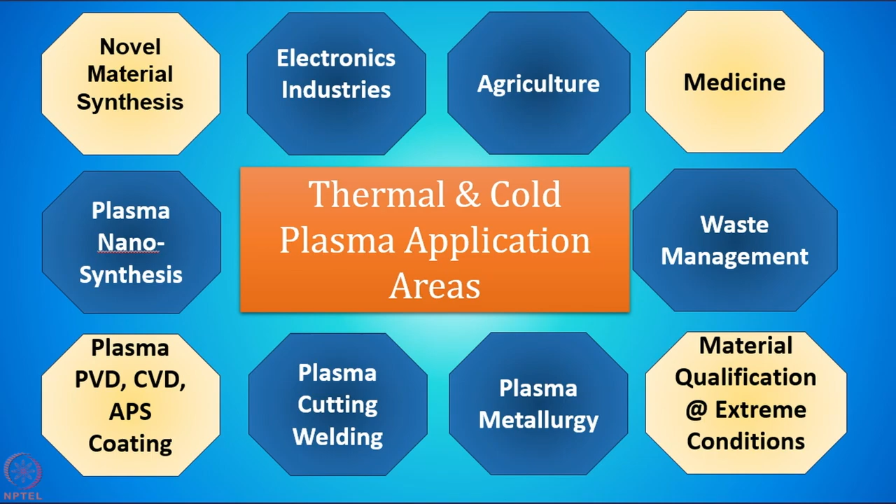In this class, we will be starting the plasma application, and we have already discussed the different areas we are planning to target in this section on thermal and cold plasma applications. The first one we will address is thermal plasma technology as an environment friendly route for waste management. I have used the term waste to wealth, and this is true by all means, since waste processing is now one of the most profiting sectors in the waste management area. Waste management using thermal plasma is a very useful technique, and why it is so, what benefits you can get, why it is called environment friendly, and what wealth you can generate out of it, that we will discuss in this lecture.

In this slide, what you are seeing is a news article from 2019. I have just copied and pasted it, I have no contribution in this slide generation. The newspaper is saying waste to energy plants that use solid waste as feedstock pose threat to environment, highlighting the necessity of high temperature for WTE, or waste to energy, plants in India. Plants in India burn mixed waste, and the presence of chlorinated hydrocarbons like PVC results in the release of dioxin and furan when the waste is burnt at less than 850 degrees centigrade. So appropriate filtering mechanisms need to be installed to control such dangerous emission. This is what the newspaper is saying.

And why do they require high temperature? They know that this is required because if you burn at temperature less than 850 degrees centigrade, some very carcinogenic components called dioxin and furans will be generated, and they are not good for our health, they are really dangerous. So emission remains a major issue with the residents. They are saying the plant was slapped a fine of so many lakhs by the National Green Tribunal. So the message we want to convey is that the normal conventional waste to energy plant concept is not new, but the waste management technique that has been in use is not a good one, not good for the environment and not for the citizens living around that plant.

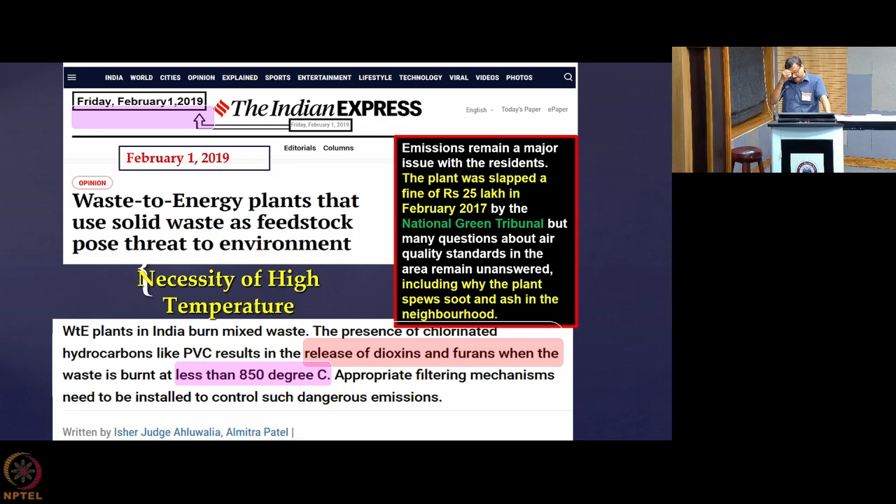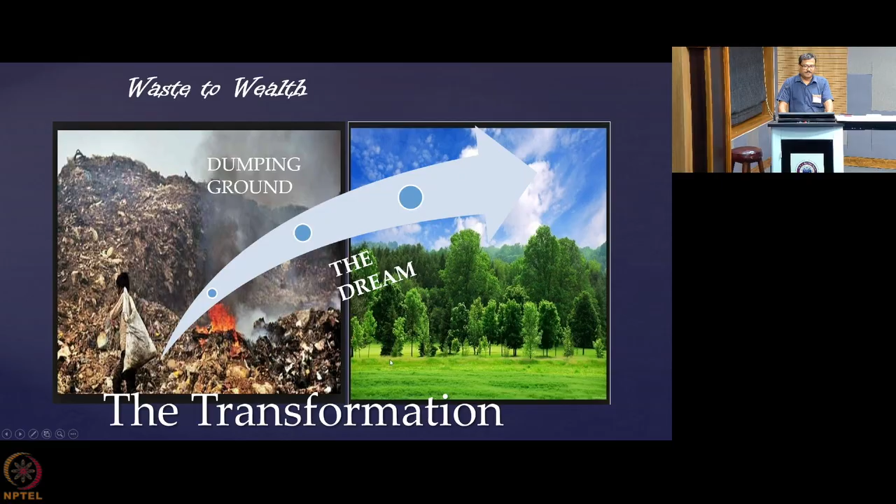So our aim is to treat all the waste that is put over the dumping ground and convert it into some useful and value added substance, and make the area clean, into a zone which is cleaner and greener to us. Obviously this is a dream that everybody would like to have, this kind of transformation we are talking about, but what is the magical tool that will give you that thing?

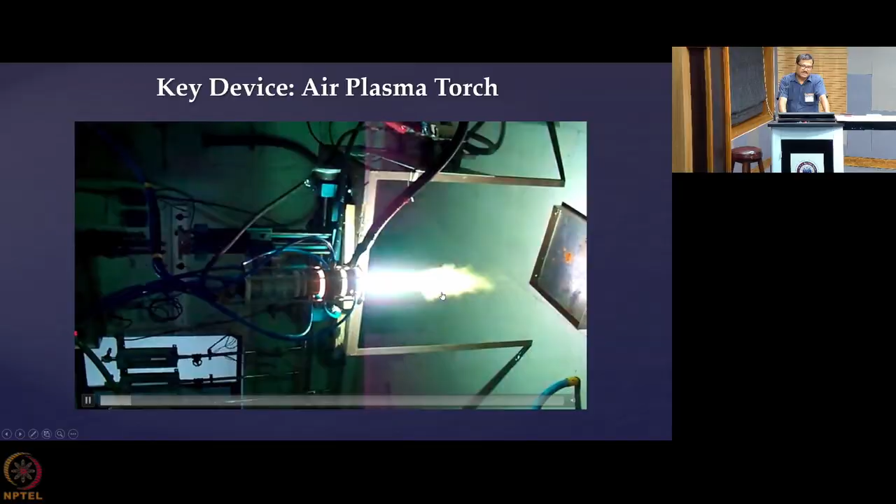So this is a thermal plasma device that has been developed, or this kind of device is available. Some global companies are already making this, but the thing is that generating a large volume plasma over a wider zone with a temperature in excess of 10,000 or say 8,000 degrees Kelvin, that is a challenge rather.

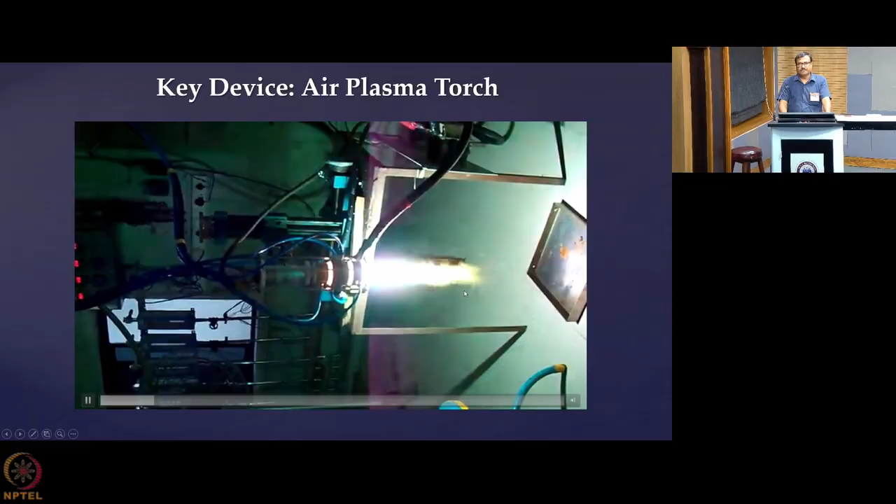Nowadays this kind of device is available, and even in India they are available now, and these devices can be used for processing the kind of waste we are talking about, and the temperature at the core of the plasma jet can go really in excess of 10,000 degrees Kelvin.

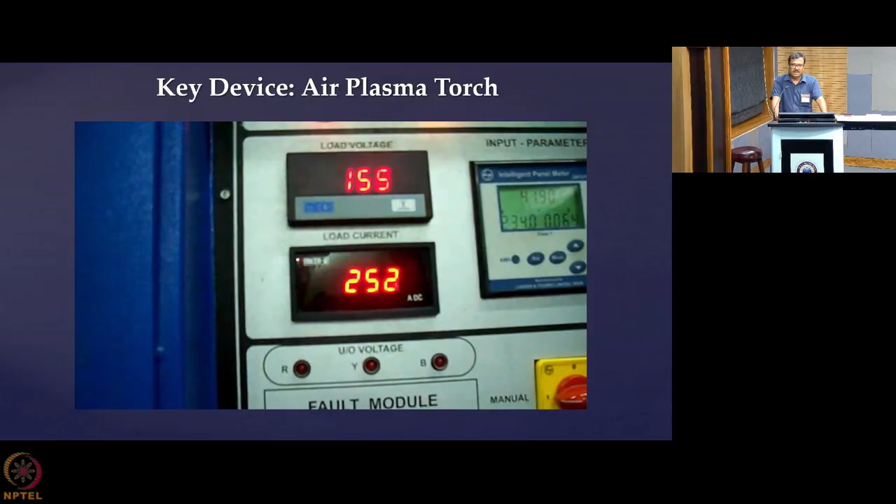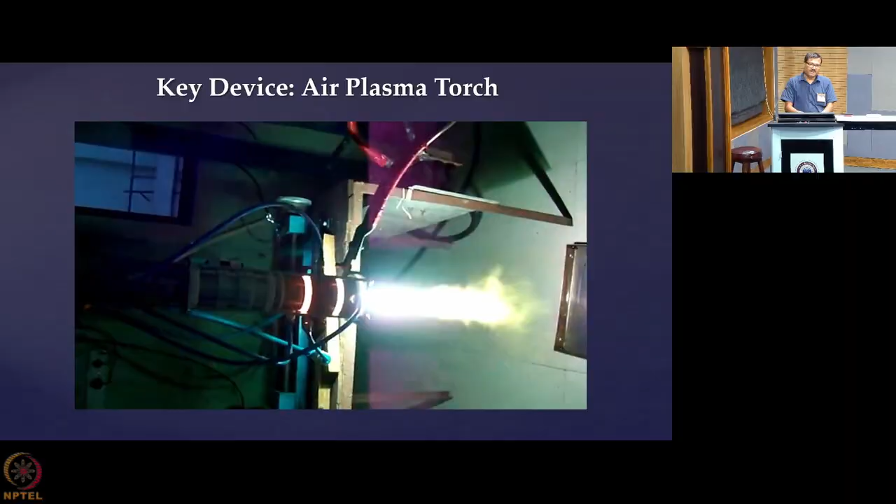When you are consuming this much power, this is not a very high consumption compared to say 1 megawatt plasma which people were thinking of previously. Now such devices are available with much lower power rating. So basically it is consuming lower power but providing a longer, larger volume plasma jet at a temperature beyond 8,000 to 10,000 degree Kelvin, which can be used to mitigate waste in a very environment friendly and economic way.

So you will be producing some material which is very useful to the society and which can be used as a fuel, as we will see.

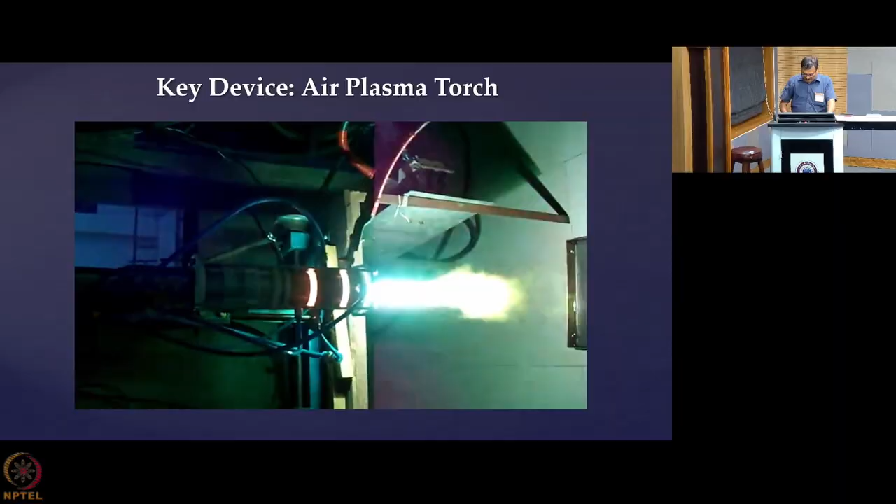Now I come to the point of where the plasma inherits its ability to mitigate waste in such an intense manner, where it gets its potential from.

So you have already seen from the equations we studied in theory classes, in the fluid model, the mechanisms it inherits: conductive, diffusive, ohmic heating, radiative, and chemical reactions. All these are applicable together when you go for thermal plasma treatment of waste.

This extremely high gradient in the arc device, the kind of plasma jet you've just seen, allows intense conductive and diffusive heat transfer. This is because of the very high gradient — this K grad term, where K is the thermal conductivity and grad is the gradient in temperature.

And this J dot grad term is there, especially for plasma, this is the ohmic heating, where the conductivity comes in. So this sigma E square term represents the ohmic heating term, and there's also radiative loss because of the very high temperature.

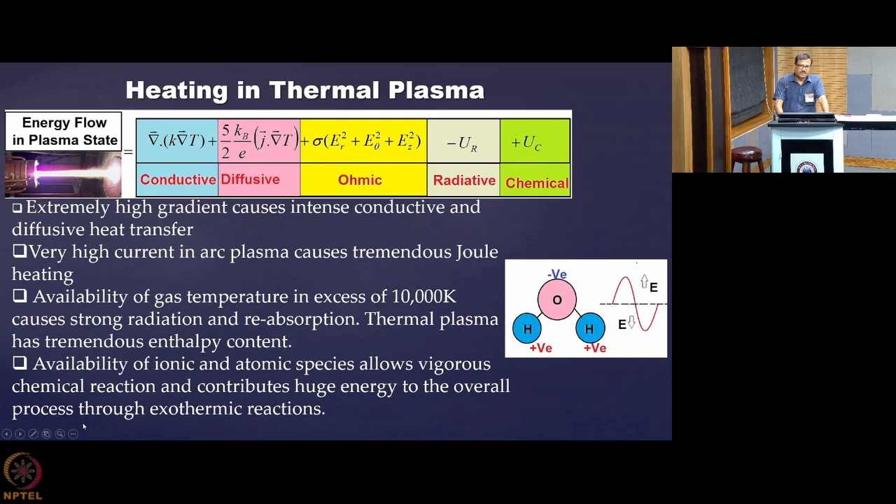Now, what are the different areas that plasma based waste management can address? One of the things is that it can produce a cleaner and greener environment, as I have already told you.

It is producing enormous amount of heat, and when you are mitigating waste properly using thermal plasma, the amount of energy generated from the waste itself through chemical reaction sometimes constitutes 95% of the energy generated inside the system, and only 5% belongs to the electrical energy.

So a tremendous amount of heat is generated from the waste, and that heat can be used to produce steam, and when there is steam you can rotate a turbine and generate electricity. So one way is to generate electricity using this plasma incineration or plasma gasification process.

The steam generated rotates the turbine and generates electricity, and if you don't want to do that, the steam itself is an agent for many chemical reactions in chemical industries. So if you install such a waste management plant near a chemical industry zone, you can supply only the steam to the industries, which can contribute significantly in economical terms.

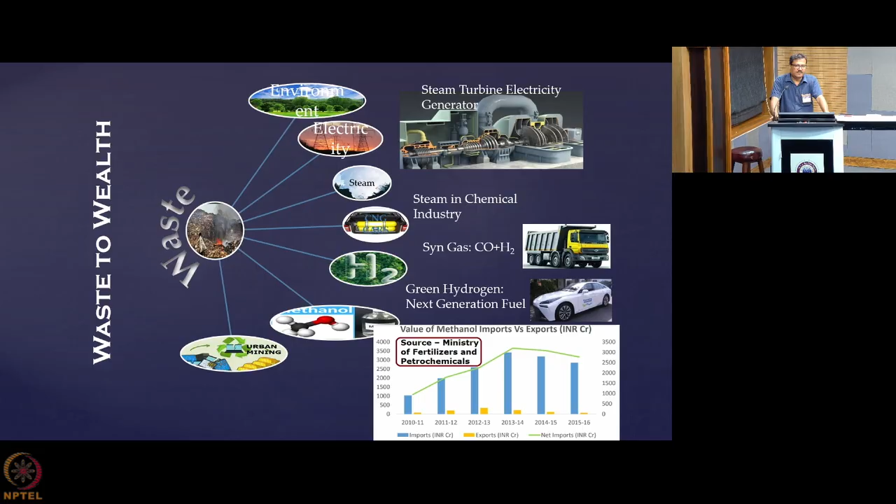What plasma does is act on those electronic components attached to the circuit board. The circuit board basically contains layers of epoxy resins with interlayers of copper within it. The board is so hard and so rigidly fixed with the components that extracting the copper or other material inside using any other method is difficult. But when you apply plasma, it can be done so easily - I will show this in some of the slides I'll present.

Now, a typical plasma gasifier for municipal waste management - the material dumped in the dumping ground shown in the initial slides - can be processed using this typical plasma gasifier technique.

What are the components there? There's a waste feeder using a mechanism - it may be a conveyor belt or a skip hoist kind of system, with a tub you can fill and pour into the chamber, where there's a mechanism to feed it inside. This contains basically four major components. One is the primary chamber, which I will explain in more detail.

Then there is a secondary chamber which is used for burning the residual gases. Then there is a venturi scrubber, which is a very useful component—I will tell you why. And then this is a packed bed column where you are scrubbing the gas using normal water, and then the final purified gas, the clean gas, is fed into an ID fan which is blowing the gas out into a stack. Now I come to the plasma business.

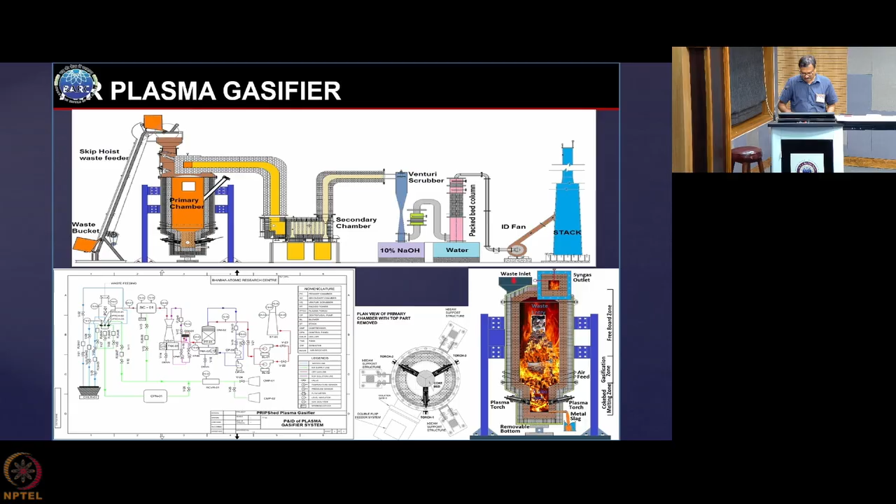So this is your primary chamber. This is the hopper in which you put the waste, and there is a feeding mechanism so that you can always isolate the chamber from the outside and still feed the waste. So the waste is coming through this and getting poured into the core of the plasma.

Now this primary chamber has three zones. One is your coke bed zone, where you have diffused the plasma torch heat and made a very wide bed having temperature at any point more than 1000 degree Kelvin. Then there is a gasification zone where the waste that you are putting is getting gasified.

Now at this point I should tell you what are the different kinds of burning mechanism. There are three kinds. One is called open burning, like incineration, where you are giving plenty of oxygen, more than what is required for the stoichiometric reaction, so that carbon forms CO2, that kind of thing. Now there is a process called gasification, where you are not giving sufficient amount of oxygen—less than the stoichiometry requirement.

So in that case, what is happening? Instead of forming CO2, you are forming CO, because there is not sufficient oxygen. And the third case, where you are burning the waste in absence of oxygen, so complete absence of oxygen.

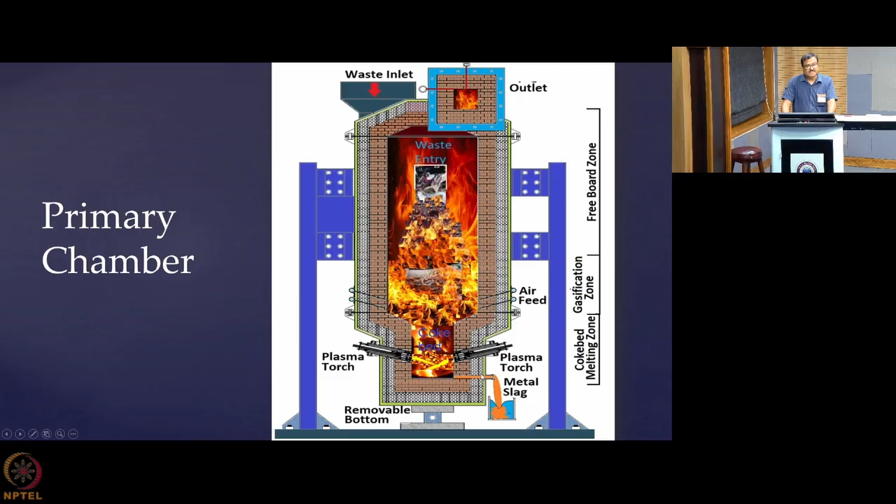Now you know that if you are introducing some metal as well, so the temperature being in this zone, actually in the gasification, it is very high, and that metal will be melt and will be coming out as a slag at the output port. Okay, so this slag can be collected, this metal slag, and as you know, this is a very valuable material.

So what you are getting in this waste processing system is that you are having a primary chamber from where you are producing CO and H2, and if you don't want to use this CO and H2 for any processing, you can burn it out, you can generate energy, and that energy can be tapped to produce steam, rotate turbine, and all this. And if you want to collect the syngas CO plus H2, then you make such mechanism, you purify it, and then you use it as a fuel gas.

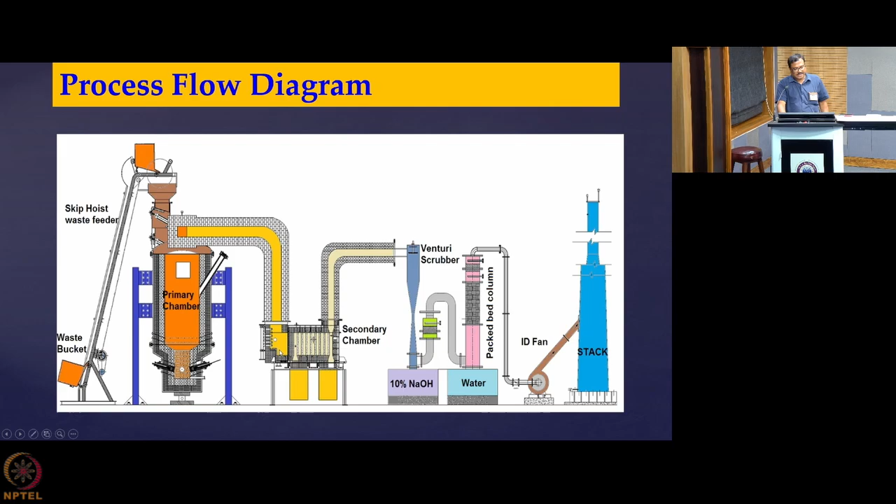And the other thing, dioxin and furan, the most carcinogenic components what we are talking about, they are having this kind of structures. And what plasma is doing, if you are raising the temperature more than 1000, they are breaking all the bonds. And what are there actually? They are carbon and benzene like structure. So oxygen, carbon, chlorine, they are all getting separated and coming out as gas.

So this most toxic isomers are shown here, dioxin and furan. There are many isomers of that. The most toxic ones are this, and you can break the bond. They are toxic to the limit that even in the nanogram level they are very carcinogenic. So by breaking the bonds, you are able to make them benign.

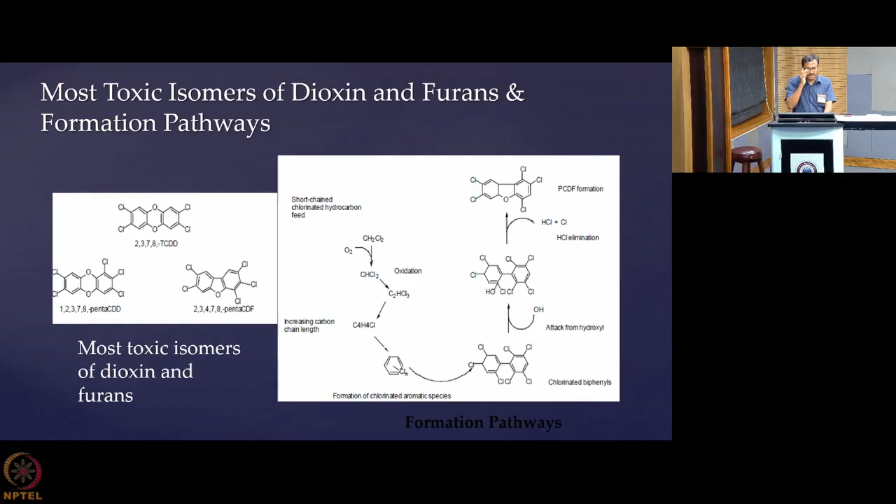So that is how the thermal plasma technology makes this possible to treat any hazardous waste, and to avoid any recombination of the produced material like dioxin you have broken, and if they are cooled down they again form back the dioxin. So to prevent that, what you do, you break the bond, and then the very high temperature gas is cooled down using this Venturi scrubber.

So this is an instrument which can cool down from say more than 1000 degrees centigrade to less than 100 degrees centigrade extremely quickly in a fraction of a second. So the time to recombine gets reduced tremendously. So they cannot form the dioxin furan back in a very significant manner. So that is why this Venturi scrubber is a very useful element in this whole processing system.

Then the gas what is coming out is again scrubbed out in a scrubber bed using water, and there is an alkaline tank. Actually this scrubbing solution is alkaline in the Venturi scrubber, which scrubs out the acidic gases because this is an alkaline solution. So at the end you are getting a very clean gas at lower temperature, say around 40 degrees centigrade or so, which is containing no harmful components. So that can be released through the stack to the outside environment.